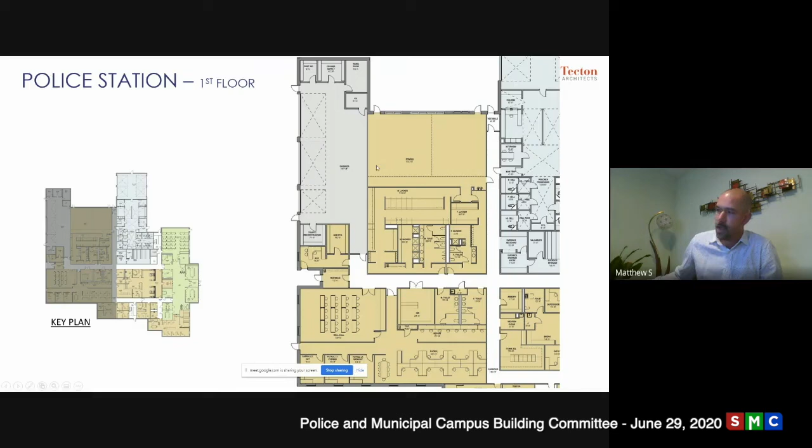Housed within this as well is the ACO, the Animal Control Officer. They'll have an office here as well. And then the main staff facility here is the locker rooms, male locker rooms, female locker rooms, and then a fitness area. This fitness area can be subdivided into several different rooms, and it will be used for fitness training, tactical training, de-escalation training. It'll be a full multi-purpose space to really keep the department in top shape and performance.

To the north of the plan is the prisoner processing area. This is where the uninvited guests will be entering the building. They come in through a secure access point here called the Sally Port. There's 2 bays here. The Sally Port is designed such that not only can a cruiser be brought in and then the doors be remotely controlled by dispatch so that an officer doesn't have to worry about any of those functions, but also that if there's a medical emergency with a prisoner or detainee, an ambulance can come into the Sally Port, the doors can be closed and secured, and then the ambulance doors can be opened and the stretcher wheeled in. So that's what justifies the size of this. It's larger than your typical garage, and that's the reason for it.

Once a prisoner is brought in to the main processing area, they are brought into this holding cell. We have this backspace here just before the holding cell. That's a secondary picking area. So as a detainee is brought into the facility, they're able to be patted down and make sure that they don't have any evidentiary material still on their person that needs to be processed.

While in the holding area, there's a transaction window between the processing desk and that holding space. This is where the breathalyzer test will be administered, fingerprinting will be done, and the general booking of that detainee will occur. We have 2 processing areas. This is for a larger influx of prisoners. If you have more than one coming in at a time, it's better to have 2 separate processing desks so you can process them more quickly. And at the same time, if you have multiple arrests for a single incident, it's good to separate them and process them so that they're not able to corroborate stories, things like that.

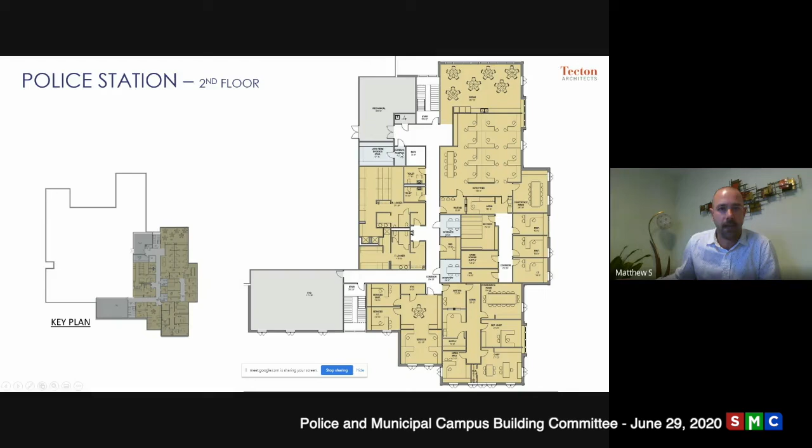We have an additional long-term evidence storage for some of that evidence that's going to be retained for 10, 20, and longer years as overflow storage. Again, we have an evidence passageway, so we have a second layer of security here to make sure that this has the same level of security as the main evidence room does downstairs.

The investigative bureau is here. We have our detectives' open office space. They have a conference room. There's 2 sergeants' offices and a lieutenant's office. They also have a couple of storage rooms, one for general investigative equipment, one for crime scene processing and supply storage, and then a records room.

They have a number of records. If you recall back from the existing conditions photographs that we showed here last time, one of those photos of the files was a number of those records. So there's quite a bit of records that get retained, just like evidence, for long periods of time, and we need to have the adequate storage space for it.

Another set of interview rooms, in addition to the interview room in the prisoner area. This is a little bit different, where this may be somebody coming off the street that you're bringing in for questioning that may or may not be incriminating themselves as they're being interviewed. So this is where you might be bringing in a suspect, or if you have multiple arrests downstairs, you might bring them into these interview rooms as well, so you're able to separate them out and interview them simultaneously.

In between those is an observation room where an independent detective can observe those interviews and have a second opinion as those are going on. It's always good to have a second set of eyes on these kind of things.

So now I just want to talk briefly about town growth and show some of the justifications for some of the growth that we're showing in the police department, what you'll see in the town hall, and then that'll sort of lead into how the program was informed.

So this is showing on the left the basic data for the building when it was constructed, when it was renovated, and its square feet. The town hall was constructed in 1966 and renovated in '97 with an addition. Its current size is 36,319 square feet. And what you'll see in the brief overview of the town hall next is that we're proposing a modest addition, bringing the total program square feet up to 44,000 square feet.

The police station, constructed in 1971 and renovated in '96 with an addition, is 17,485 square feet, and the program square footage is 38,438, and that's reflective of the floor plan that you had just seen.

The senior center was constructed in 2000. There's not much growth in the program, and what you'll see when Justin presents is that we're not proposing a lot of changes to the size of the building, but just the organization of the building to better address the programmatic functions and how that building is used for more efficiency.

So the existing square footage is 11,400 and the program square footage is 11,835. You'll see how that is addressed with the conceptual floor plans later on in the presentation.

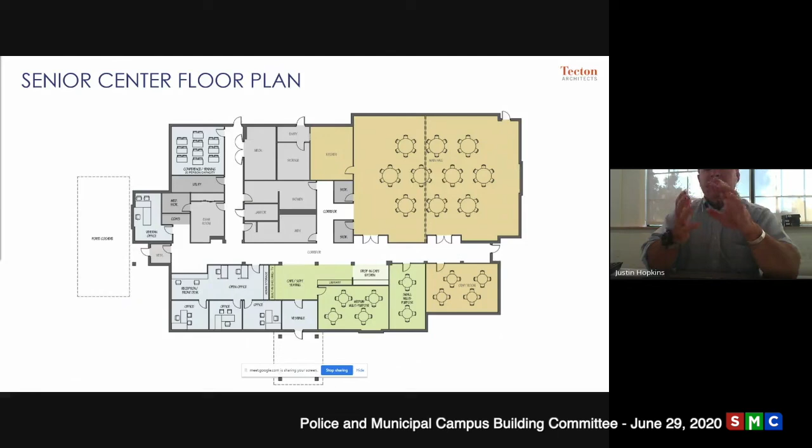Adding these rooms allows for flexibility in programming - for cards, for separate evening meetings, after hours meetings, yoga classes, additional crafts. They will greatly increase the amount, quantity, and type of programs you can have at the senior center.

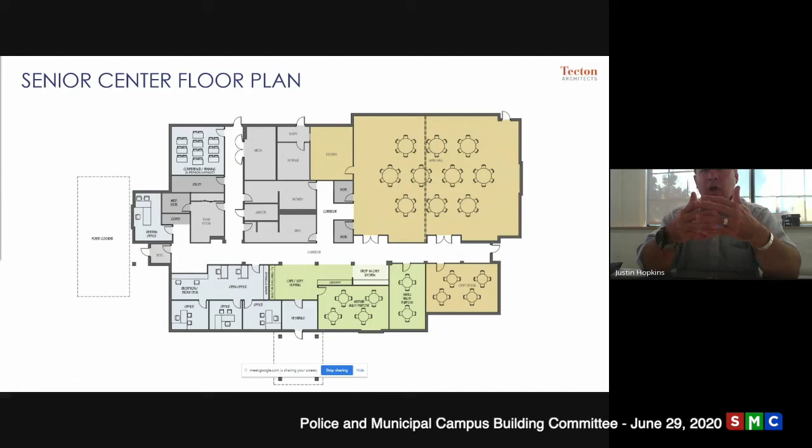Immediately to its left, we have some built-in shelving for a library, as well as some soft seating. So just off of the corridor, we'd have some occasional seating that is also public book storage, periodicals, and our drop-in cafe - all kind of in the center of the physical building. We're also opening up a corridor to our toilets.

So directly across from the drop-in cafe and the soft seating, we're creating a secondary corridor that gets us into the toilet, both the men's and women's toilet room, which provides entry to those locations at a more central spot within the floor plan. As I mentioned in our opening comments, we have the proper amount of toilet fixtures for this size of the building.

So just providing an additional access to the bathroom is how we achieve the distance deficiencies of the overall toilet rooms. In summary, by repurposing some of the existing space within the existing building, we're able to provide 2 additional program rooms, multi-purpose rooms, 2 additional private offices, as well as resolve some of our circulation issues to the existing toilets, and provide an additional drop-in cafe for the seniors to use. I think that's the general overview of where we are for this scheme.

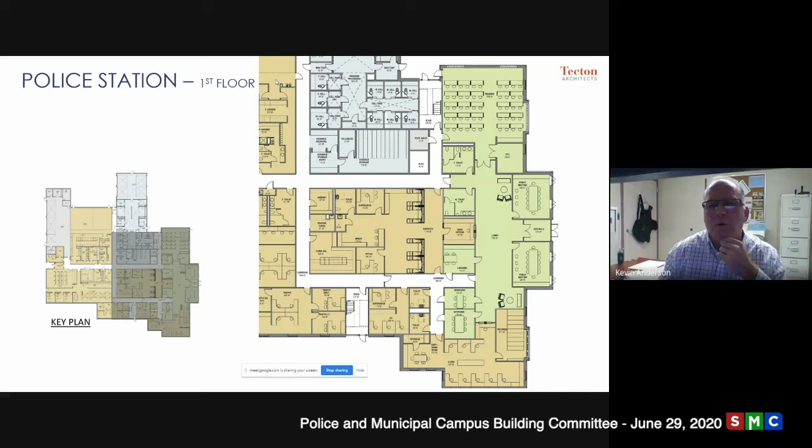Thank you. I just wanted to echo the dispatch questions, like Mr. DiPaolo said. What is the future going to bring for dispatching for the community, whether it's going to be regional based, will you do police and fire dispatching, and do you have enough stations there? I noticed in the space needs assessment that you were going to use the training room as a backup EOC, and I don't know what type of communications for emergency operations centers this dispatch center would serve, but the bigger the better for future expansion. I don't want to get too much into it since I don't know the town's plan for police and fire dispatching, regional or otherwise, so I'll leave that to you guys.

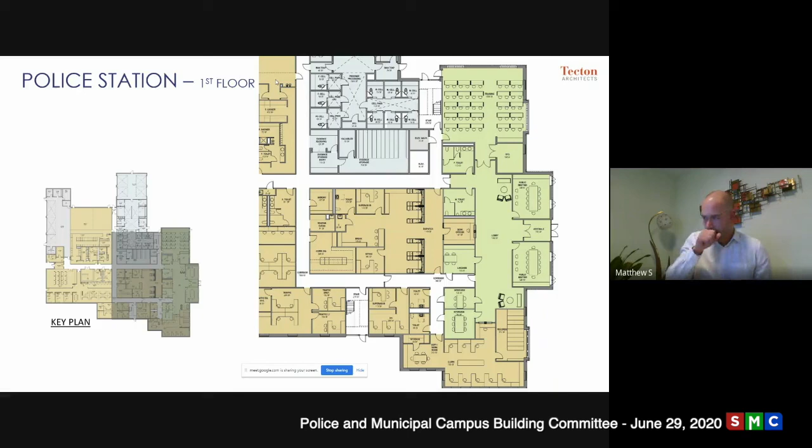So let me clarify a few points. This is police, fire, and EMS, everything that's emergency services is dispatched here. They'll also have pretty much all security cameras throughout the town monitored here, and any emergency notifications that need to go out to the schools or anyone else would happen here. It's my understanding there's already an EOC in town, so during storm events, if there's an issue or overflow required, this would be the secondary or even third EOC in town. It would be the same as any other EOC, taking all personnel required from the town, DPW, police, fire, EMS, town administration, whoever needs to be in the room for emergency services would operate here. There'd be a number of phone, data, and monitor displays to track any emergency situation, and that would all be here.

Any follow-up, Joe? No, that clarified it. The only thing I'd add is that I was on the Public Safety Building Committee in Southborough for the police and fire station, and I recall when the state 911 system came in, they had an additional hookup. So if something happened in the building, like a fire or flood, and you couldn't use the dispatch center, there was a quick hookup connection you could use to tie into radio communications and keep things running. That's something to consider. I'll find out more about that and get back to the committee.

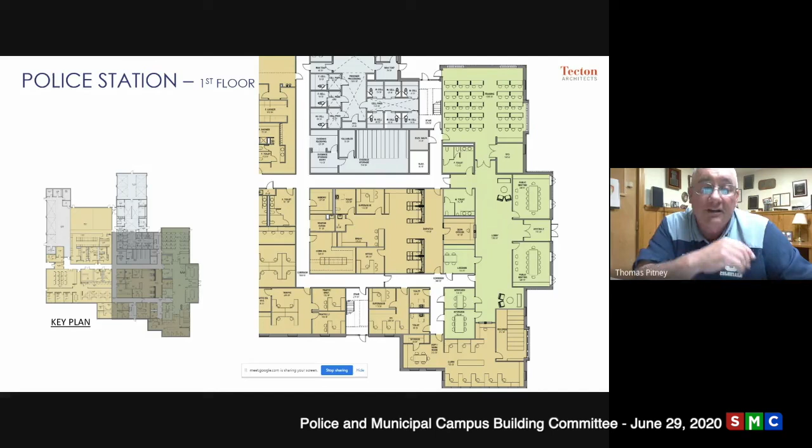I do have a couple questions. Matthew, thank you, you answered my question on dispatch. I was curious about the generators and how we extended that, so thank you for that. But I guess I just have a general question based on the changes in the world over the last 4 months. How has the design or the processing changed based on, number one, COVID-19, and number two, the protests occurring around the nation, and how they might affect the police station and how it functions?

Yeah, that's a good question. Changes in the public and emergency response due to any sort of event always sort of changes the way that these facilities operate. The biggest paradigm shift in police station design was what happened right after 9/11. So those sort of events always inform the way that we design these facilities. COVID-19 is no different, civil unrest is no different. That's something we've always dealt with in police stations, right?

So a building is brick. Police station is typically brick, not just because it fits the community character of a typical New England town, but because it's intrinsically bullet resistant. We also do things like, it's one of those things you don't like to talk about because you don't want to have some sort of incident happen at a police station, but the entire public interface between the public and the rest of the private functions of the facility is going to have bullet resistant walls. Depending on what material we use, we typically use Kevlar lined resin impregnated panels, a lot of words for a fancy term for bullet resistant panel. They go into the wall so that if somebody does get in the lobby wishing to do harm, they can't. All of those windows, all those transaction windows are also going to have the same sort of protection.

Additionally, there's specific fire ratings that we do. We fire rate specific areas above what's required by the code, because you never know what's going to happen in these facilities, and they need to operate. You're dealing with people that really need to be protected because they're the ones protecting us, right?

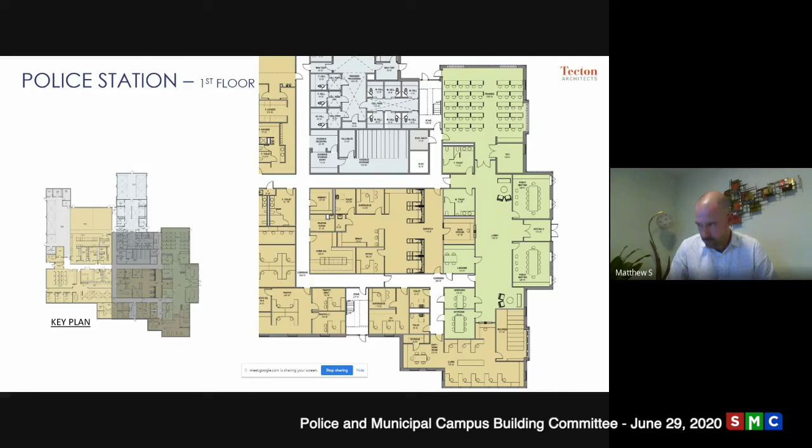These are the crazy things that we have to think about. As far as COVID goes in pandemic response, we've been discussing this with a number of our police and fire chiefs that we've been working with. One of the main issues we've seen is the disruption of administrative services and their disconnection with the rest of the department.

A lot of chiefs are having to work from home because you can't risk the administrative staff getting infected, as staffing levels rise and drop because certain employees are getting infected. One of the fire stations we're working on now, one of the firefighters got infected with COVID, and the entire 19-person shift had to get quarantined for two weeks. So staffing levels become a huge issue with that.

So making sure that the administrative function can still happen so that the police department can still operate is important, separating different parts of that. Let me go to the plan on the second floor real quick.

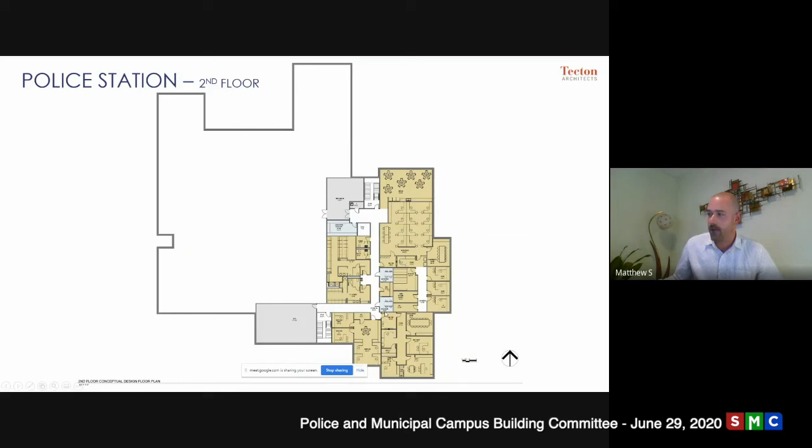One of the simplest ways we're doing that is as you come into the investigative suite, this is essentially a public lobby for investigative. If you're coming to talk to any of the detectives, same thing if you're coming to talk to the chief, they have their admin staff, and their admin staff is going to be behind a protective wall inside an airlocked vestibule. So if somebody is coming in and you don't know if they're infected with some sort of pandemic, COVID-19 or whatever's in the future, we're making sure that they're completely separated so that if a pandemic is going on you can isolate that, but those functions can still go on.

We're dealing with different ways that the HVAC systems are circulating. We're enhancing the filtration—a lot of this is research that's still ongoing. UV sanitation is a big thing being looked into, whether it's increasing outside airflow in the HVAC system and reducing recirculated air so you're not recirculating virus, then putting the potential for UV light as a disinfectant treatment for any air that is recirculated. People are also looking into UV sanitation for room disinfectant. These are all things that are top of mind, but the research is ongoing.

So I think that answered your question. There's a lot of things that are going on.

I've seen some of those UV machines. I think they start at $100,000, but they do work. They seem to work anyway.

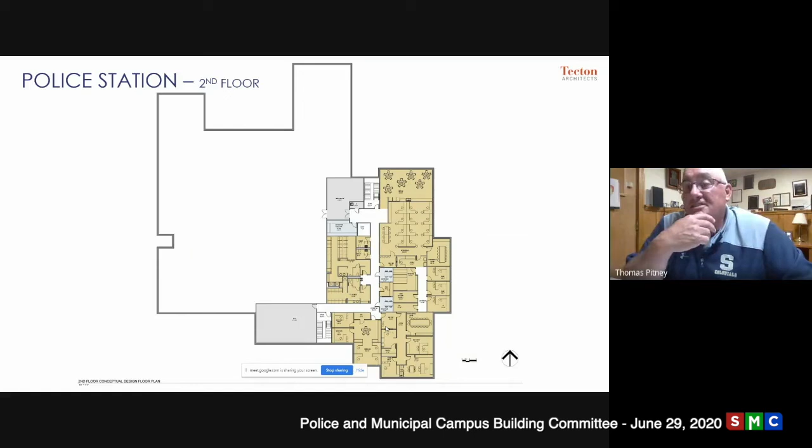I did also have a question, and probably part of it is my ignorance on this type of thing, but could you talk a little bit about the Sally Port, and is this typical for this size department and this size town? I'm just not that familiar with them, since we don't have one in town right now.

You do have a Sally Port now. It's not... oh, we do. Well, see, there you go. Okay, yep, so are we just making it bigger?

Yeah, so the one you have now isn't large enough to bring an ambulance in securely. Actually, Lieutenant, can you even get an ambulance in the existing one? You have to back it up to it, don't you? Yeah, you can't get it back in. We've had trucks actually hit the top of it, so it's damaged.

Two Sally Ports for a town this size is the average, I would say. We did two Sally Port bays just south of you, and that's a significantly smaller town. Would there be room for expansion if we needed to on that? There will, yes. We would have to redo the parking a little bit, but there is room to expand to the north.

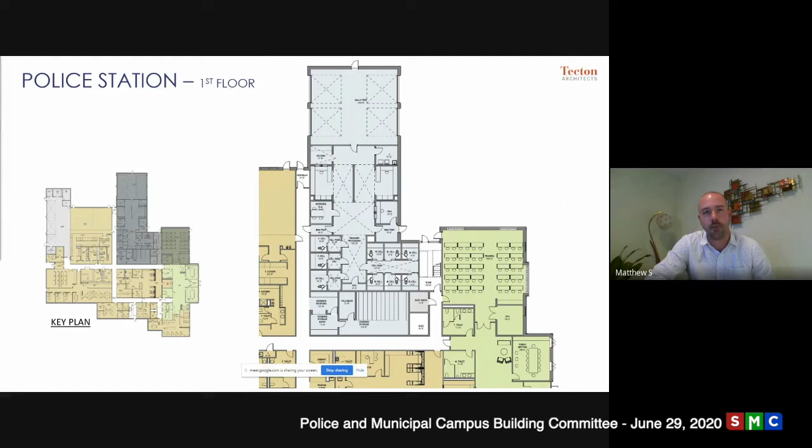And I guess my last question, going off the police station a little bit—I have a question on the senior center, so I guess this might be for Justin. When I read the feasibility report, it showed that in the main lobby one of the concerns was that there was only one exit point if there were a need for an evacuation.

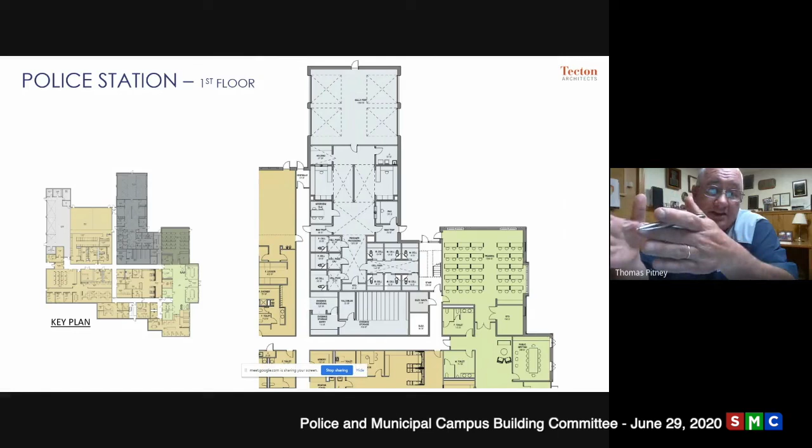And when I saw your presentation with the design, it didn't seem like that changed. It seems like there's one exit to, I'll call it, the northwest side of the building, and the other two exits go out into the corridor. My concern is that if you had a fire or something like that, there's only one exit in that main room. So, yeah, Matt, can you go to the floor plan? Yeah.

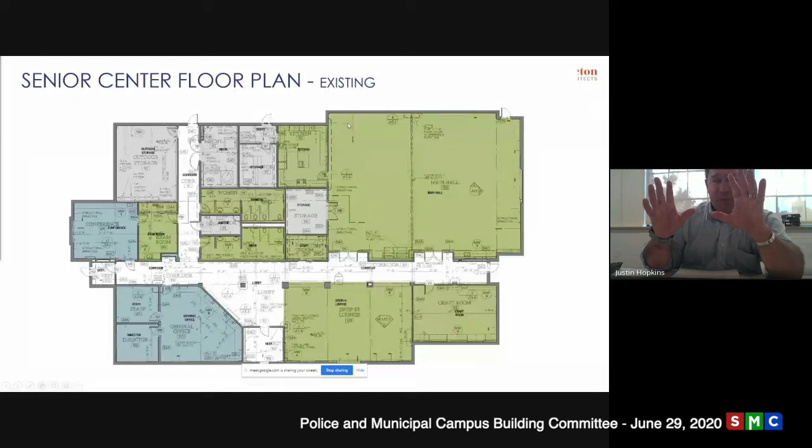So yes, this is something we're going to have to take a look at. The issue is that when your main hall folding partition is open, you have more than the required means of egress there. You have a spot out the back, and you have two doors that go out to the corridor.

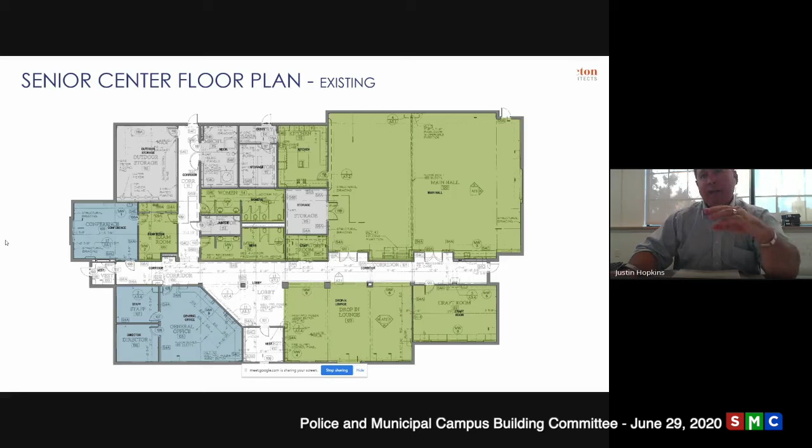When you have the folding partition closed, in the left portion of the divided room, you only have two means of egress out. One is into the corridor and one is through the kitchen and through the entry. It's not necessarily what the code intended when it says you're allowed to egress through adjoining spaces. There is a provision in the code that allows you to exit through an accessory use space, but typically that kitchen would not be considered an accessory means of egress.

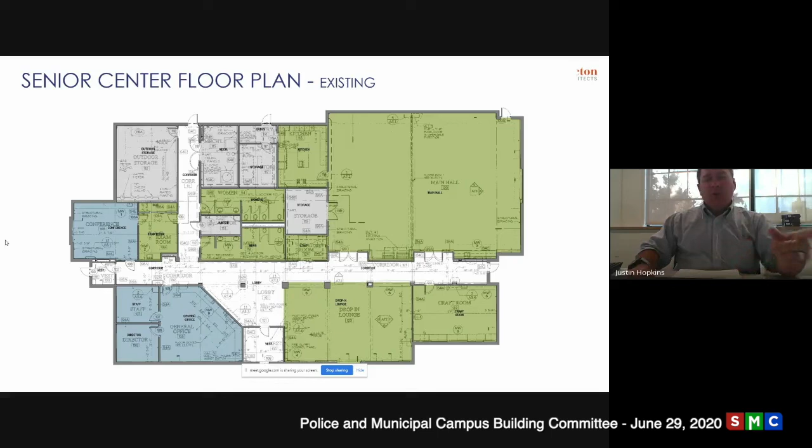So if we go to the proposed plan, Matt, what we're doing is we will want to look a little more at the remoteness of the means of egress, but we would be providing corridor access on the same wall that the kitchen door is on, into the toilet alcove entry. There are a couple ways we can get through that. We can put an additional door in the exterior wall to the north of that room, or we can provide a door within the folding partition. Sometimes they'll make a panel that allows you to go through.

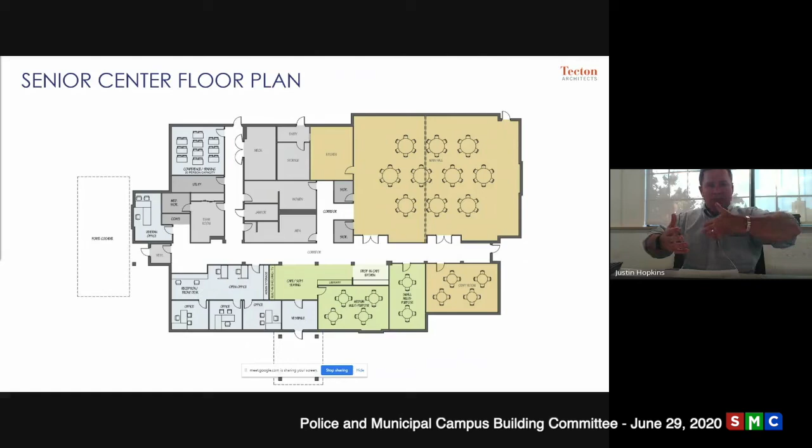So those are things that as this gets closer we'll certainly want to make sure we're compliant with all the means of egress requirements. But that was the only one I think we had enumerated in the existing conditions report. I think so.

Yeah, my concern is the number of people in that room, the population we're serving there, and the distance they may have to travel, in the wake of an emergency. Yes, good catch. Thank you. Okay, thank you, that's all I have for right now.

Anything else out there, Mr. Pitney? I did have just two brief questions. Go ahead, Mr. Collins.

For our architects, I understand and appreciate all the universal best practices and design of police stations that you brought to bear here. I'm just curious if you could talk briefly about what level of input you had with police department personnel, and what levels of input they were able to have impacting the current design for Shrewsbury specifically.

And then secondly, I probably missed this, but is there anything with regard to any kind of covered bays or storage for part of the fleet of vehicles just to protect those assets from weather? So I'll answer the second question first.

As far as the input of the department, we had many meetings with the chief and the lieutenants early on in our programming sessions. From there, as we refined the program and the plan, the chief and I were talking probably two or three times a week about various modifications, as he was communicating with the rest of his department. He would direct his staff to discuss with me any of their specific requirements. I had discussions with the animal control officer, and Lieutenant Anderson and I had many conversations about the department as well. Those conversations will be ongoing, but we did speak with a number of staff on many occasions.

Very good, thank you. Anything else, Pat? Nope, that'll do it, thank you.

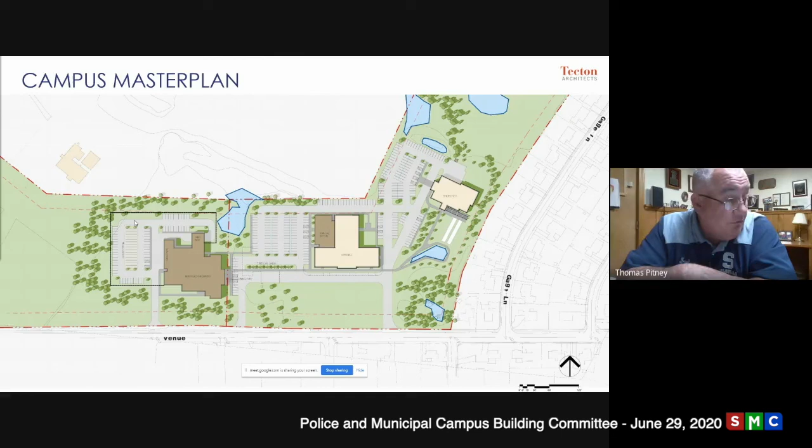So I guess if there are no other questions out there, what's next in the process? Pat, Mark, Paulo? I thought we were going to do one building at a time, so. Oh, I'm sorry, that's okay. I just have a couple of questions about the senior center.

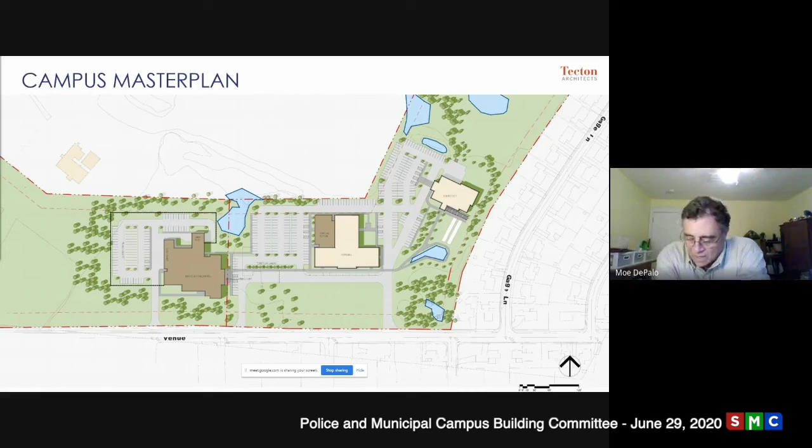Does this tie into the strategic plan that was developed to redo the building? Yes. Part of the strategic plan was definitely to utilize the space more appropriately. As Justin mentioned earlier, there's a lot of wasted space, which prohibits us from doing the programming that we want to. So I would say yes, it definitely ties into the strategic plan.

Okay, thank you. If I could ask another one, Mr. Pitney. Justin, moving the entrance to the side is fine, but looking at this plan, it doesn't look open and inviting to come in. It looks almost like an office building with a long hallway, not a lot of open space in there.

It's hard to tell from the size of the plan, but that side entrance looks really small, especially if people are going in with a wheelchair or something like that. How big is that room? The vestibule to the left is smaller than the larger vestibule to the south, but it's compliant for both accessibility and means of egress. I would say that vestibule itself is probably 8 feet by 8 feet with doors.

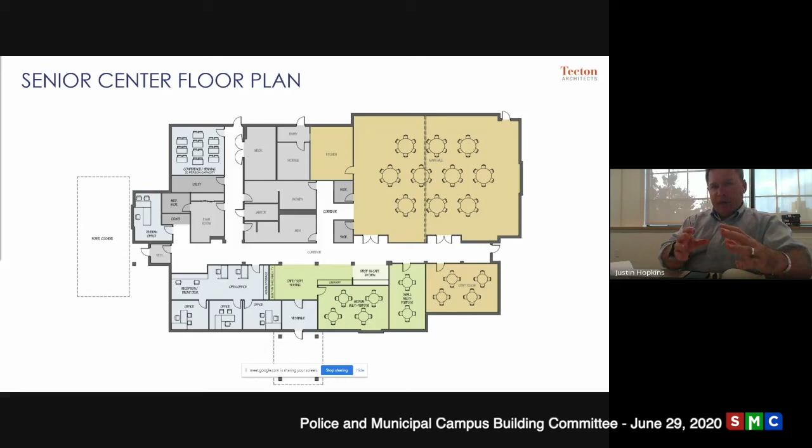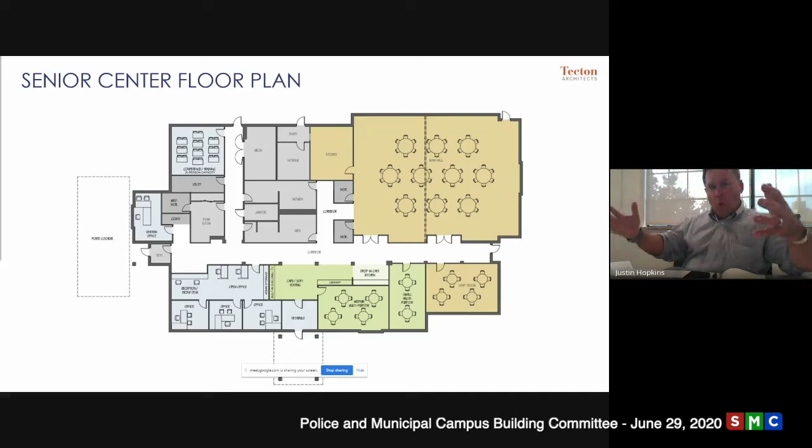The one thing that perhaps isn't rendered as effectively in the floor plan is that the proposal has a tremendous amount of openness within the middle of the space. The challenge will be to make sure our check-in and administrative area provides a welcoming environment upon entry, so that the breakout space and occasional seating in the middle of the corridor feel like they're all part of the same room, part of our core center of the building.

Could I ask one more question? Your point's well taken on the vestibule. It looks like there's plenty of room there to make a bigger entrance. I know it might meet code, but it just seems that if there's room there, making it 10 by 10 or 12 by 12 would make more sense than having the main entrance be that small. Having worked in an environment with people with disabilities, if you could go back and look at that and see if it could be made bigger, I would appreciate it. It just seems too confining to me, given what I know about people with mobility issues trying to get around. Just a thought.

Sure, absolutely, thank you, your point's well taken. Very good, thanks, Moe.

Mr. Pitney, I apologize, but I'm going to bail out right now, and I will join you again in hopefully 10 or 15 minutes if time allows. Okay, thanks, Neil. Thank you.

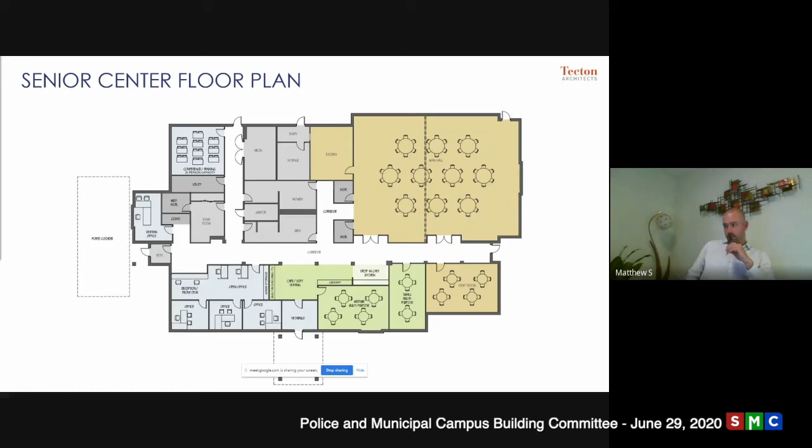Mr. Pitney, I have a question for Matt. I was just wondering, the far wall with the main hall room for the senior center, could that possibly be like a slider or glass or a bigger open door area? I believe in your other plan it said something about an outside seating area behind. Was that true, or is that in the front now? That is in the front, proposed to be in the front of the building. But if your question is can we make modifications to the exterior building envelope to provide a more open means of egress or occasional use from the inside to the outside, whether it be glazing or actual doors, yes, we can do that within the building envelope.

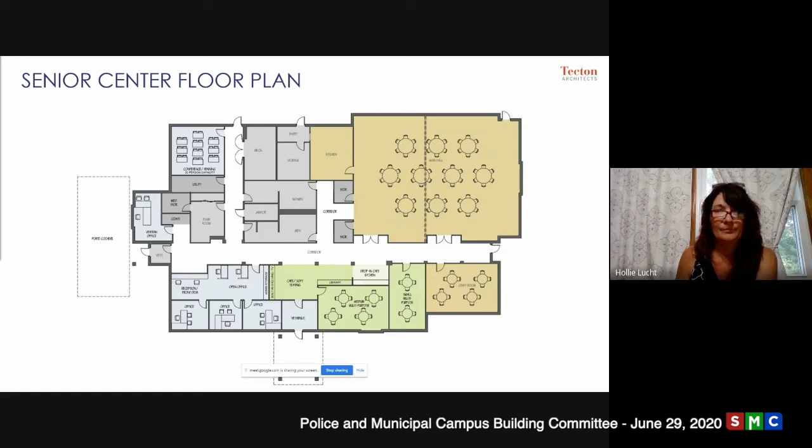Very good, thanks Hollie. Anything else out there? I haven't heard anything on town hall. Any questions regarding town hall? Pat, no. I do have one, go ahead. Thank you.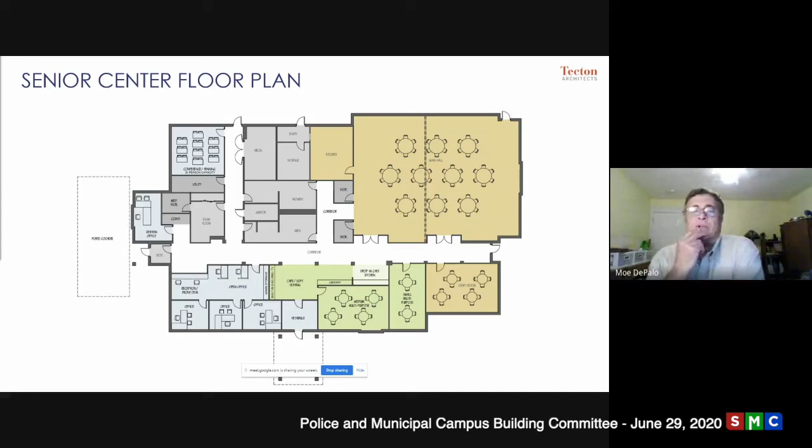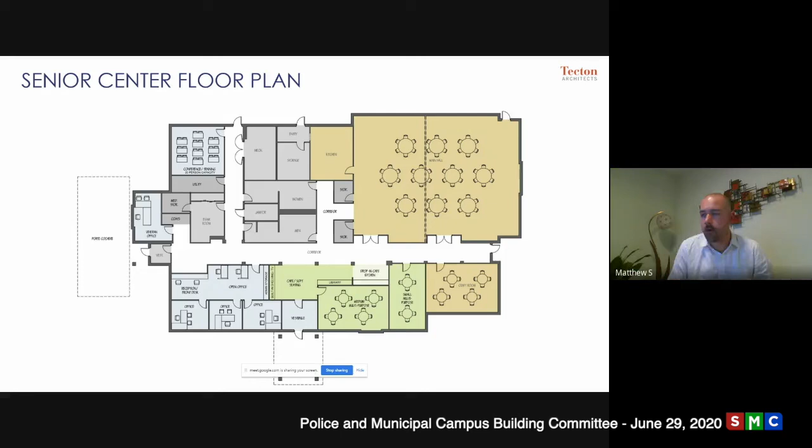I do, maybe I missed it, but it didn't look like there was a lot of meeting space in that building. Did I miss it? In the town hall? Yep, we're on town hall now, Matt. Yeah, yeah, let me go to that plan.

Like I said, we're going to discuss this in more detail at the next one, but to your question, meeting space was one of the primary program factors we were exploring, and it's one of the major deficiencies within the town hall itself at the moment. Currently there's a small meeting room here, the selectmen's meeting room, and a medium-sized meeting room down here. We're increasing the number of meeting spaces within the town hall and within the campus. At the police station, we're adding 2 conference rooms on the lower level. We're also adding a subdividable conference room here, which would provide 2 additional conferencing spaces once subdivided, or 1 large conference space as well.

There will be a conference room as part of the school department. We are adding a conference room for the town manager right here, one for the treasurer, and this small meeting space would remain as well. Oh, and another small meeting space by the assessor's office. So what currently is only one small conference room and two large meeting rooms, we're adding five or six.

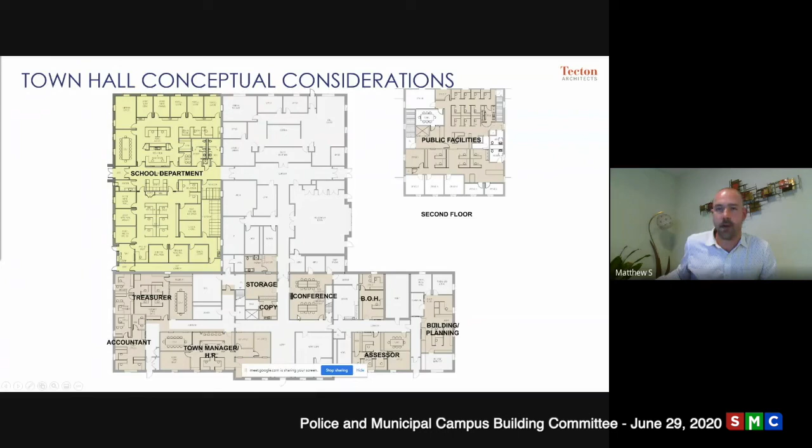So the intent was the old selectmen's room function would be replicated here. It's shown as two sets of tables with a folding partition, but imagine this as one space, maybe with a training room or classroom layout, this would replace that function. It's not exactly the same size, we're constrained on existing space. The assessors fit much better where the old selectmen's room was, but this would essentially achieve that function for after-hour meeting space for the public. Okay, thank you. It's hard to tell without dimensions. It's a big building, so thank you.

Mr. Penny, Kevin Mizikar, can I add a couple things on that? I know we're going to dive in more on the design. One of the things we asked Tecton to do is get staff out of non-windowed spaces, so that's why you'll see a push to have conference spaces in the interior hallways and staff offices on the exterior of the building. The assessor's office is currently a challenge, but Tecton did a good job with the main entryway off the police station, there's a number of conference and meeting room spaces there that are separate and independent from the secure area of the police department. Since we have overlapping staff and cleaning crews on the municipal campus existing, we'll be able to use the front of the police station for meeting space in the evenings without any additional requirements for management, because it'll be in a secured area just like the town hall is. So I just wanted to add those two things.

That's it. And as I recall, the large meeting room at the police station holds up to 50 people? That's correct, well more than 50 people, but yes. More than 50 people, okay. And that would be available for any group that needed that kind of space? Yep, that's correct. Very good. Anything else out there?

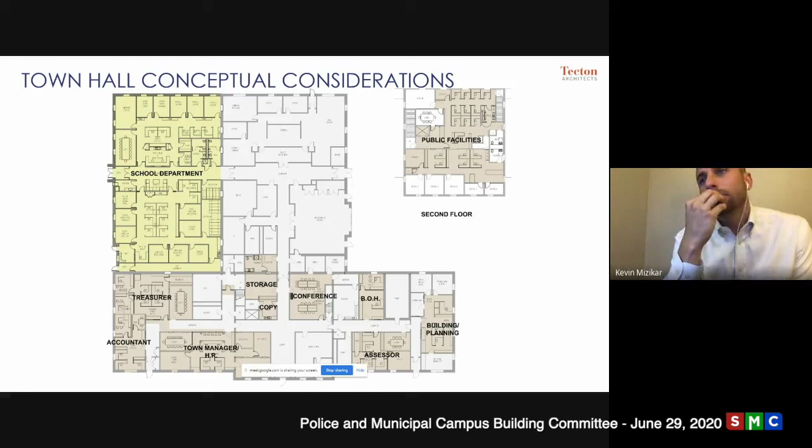And as I say that, for those of you who haven't been involved in a building committee, there's months and months of design work ahead. So plenty of time to ask questions, like you did this evening, which is great. So thank you for doing that.